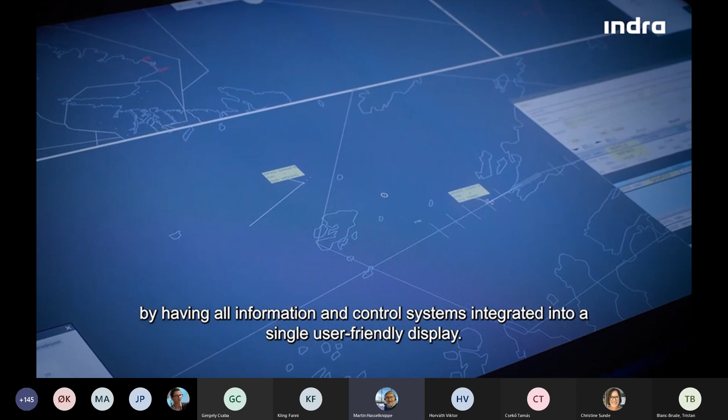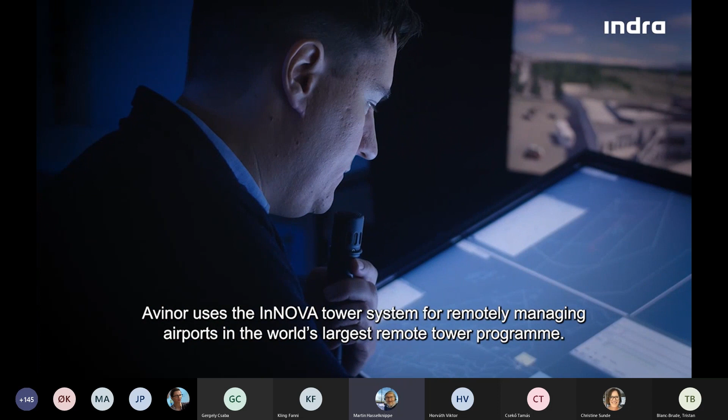We live in a digital era in which we quickly adopt new technologies to make life easier. Yet manual processes and visual observation, looking out the window, are still crucial for air traffic services at most airports. At Indra, we believe in progress. To improve efficiency of service, the InNOVA Tower system allows air traffic service officers to manage several airports from a remote location. Situational awareness is ensured by having all information and control systems integrated into a single user-friendly display. As part of an EU-funded SESAR project, Indra and Norwegian air navigation service provider Avinor have collaborated on research to further improve cost and operational efficiency. Avinor uses the InNOVA Tower system for remotely managing airports in the world's largest remote tower program. Together, we have successfully validated dynamic remote towers, allowing flexible allocation of airports between different working positions. In 2019, we validated that one air traffic controller can manage up to 3 airports from a single integrated working position. Now we've taken it one step further. We allow controllers to move control of airports to different working positions. If something happens so you need to focus on a single airport, you can transfer the other airports to your colleague. This brings a new level of teamwork and operational flexibility to air traffic management. During this validation, we have simulated the operation of 3 airports from one single working position, but we have also introduced aircraft emergencies and bad weather conditions, and we have also focused on the transfer of airports from one working position to another, and included in that the supervisor role in the control room. The experience is that it's good to integrate all the functions into one single working position and to have all the functions that are needed for the controller. That also helps us in organizing the service provision in the future. Like many other countries, Norway has a lot of smaller regional airports. They're operated by 2 to 3 controllers each. If we can do that in a remote tower center, where one operator can operate 3 airports, 3 operators can operate 9 airports, we can get a more flexible service, cheaper service, and not to forget that the work satisfaction per controller will actually increase massively. The future is here. Embrace the progress.

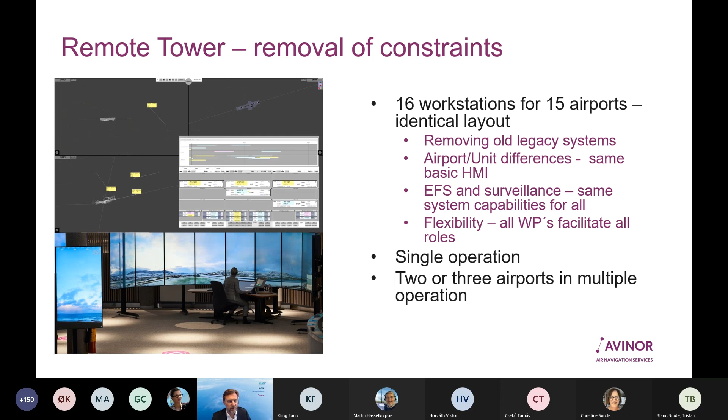And with that, we will be achieving cost benefits. To do so, we need to have multiple aerodrome endorsements for each individual working in that center. That we have started already, although multi-mode is still a bit ahead of us. We start with the multi-aerodrome endorsements because that will also give us more flexibility in single mode.

With the operators having more than one endorsement, we can train, we can plan, we are more robust when it comes to single operation. And there could also be times a day where we could do what we call sequential mode, where one operator could still operate 2 airports, but then only one at a time. But of course, multiple aerodrome endorsements is the key enabler for multiple mode.

To do so, we will have one unit training plan and as few local differences as possible. That's part of the remote program, to now make those tower operations as equal as possible. So the same tools, same basic HMI for all aerodromes, and common unit operational procedures as far as possible. Of course, there will always be local adaptations when needed, but if not needed, we will do it the same.

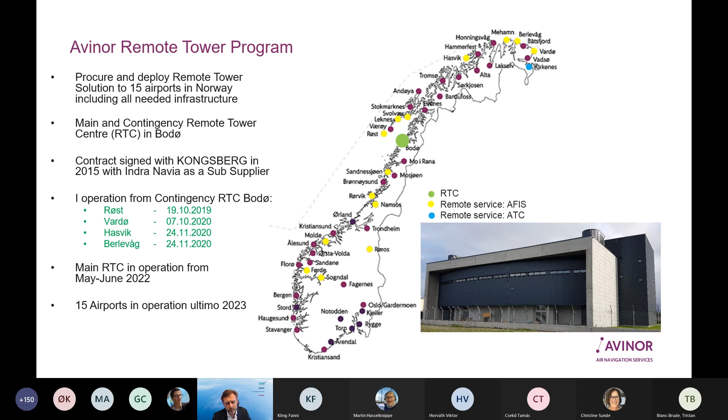The main center, as you saw, is now built. We have set up all RTMs to handle up to the 15 airports. This center is now in the final stage of testing. We have conducted both the FAT and the SAT on the software. We have done the passive shadow mode, and we are now doing the last week of stability tests on the software. So all in all, this center is now ready to be put into operation, and we'll do so early in May.

Starting off in single mode, the position in front here, where people are now just sitting with laptops, will be the operational supervisor position. When we go into multi-mode, we will build up the supervisor position, and the supervisor will have line of sight to each and every RTM and operator within this building. So what we're doing in the SESAR validation now will be the next move in this center, where we upgrade it, so to speak, to go into multi-operations.

A few more pictures from the center. We really believe this center will be a really good place to work. We are able to bring a lot of people to work together here, hopefully with good discussions among the workers, and we will be able to build much more flexibility and robustness into the operation in this center than what we have today in the individual towers.

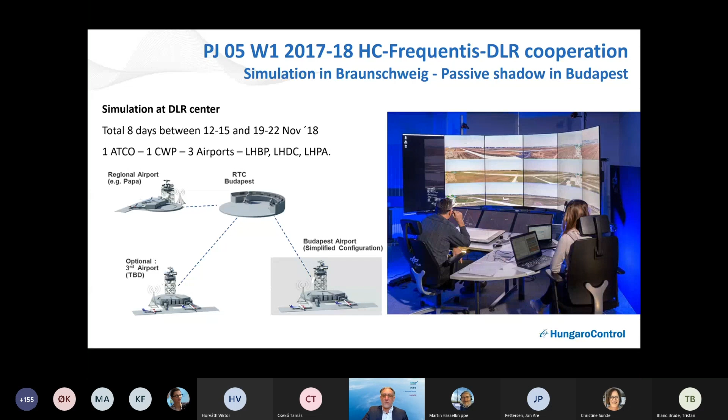So therefore we went on with this project, and we made a passive shadow validation at Budapest after installing the camera systems for all the 3 airports, passively monitoring the traffic, not controlling, but monitoring from the centralized controller working position.

The lessons learned, the usability, situational awareness, and the procedures. We got a better understanding and better knowledge of how these kinds of operations with the multi-remote can increase situational awareness, what conditions are needed for the controllers to handle the traffic safely, and what requirements apply not only to the technical system itself, but to the procedural and the training side for the human staff to provide the service without any issues and increasing the safety.

So last year we went on with this project in cooperation with Indra, and last November we had a simulation in Asker at Indra's headquarters. We provided the solution 35 with multiple remote tower planning using the planning tool provided by Indra, and we had quite a lot of lessons learned during these simulations. The results will be introduced later by my colleague Ms.

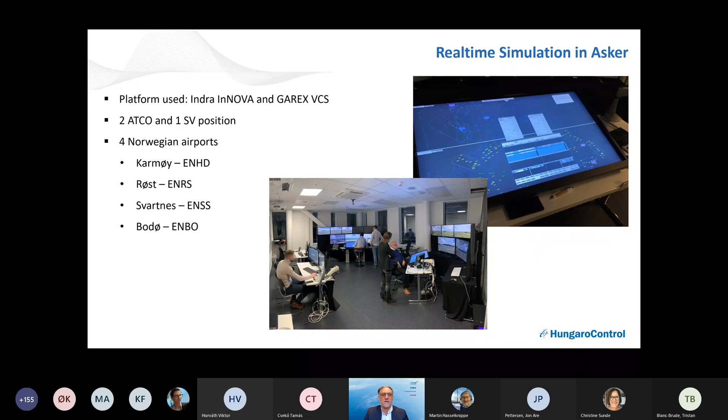So in a nutshell, that was my presentation, and the results you will get later on from my colleagues. So thank you very much for your attention.

Thank you very much, Csaba. Very interesting to hear. We will now move on to the next part, talking about automatic speech recognition. It will be presented by Georgi Balog and Viktor Horváth. But before they start, we'll show you a short introduction video to this topic, which is a new topic to us and to many, automatic speech recognition in ATC environments. So then I'll switch over to the video again.

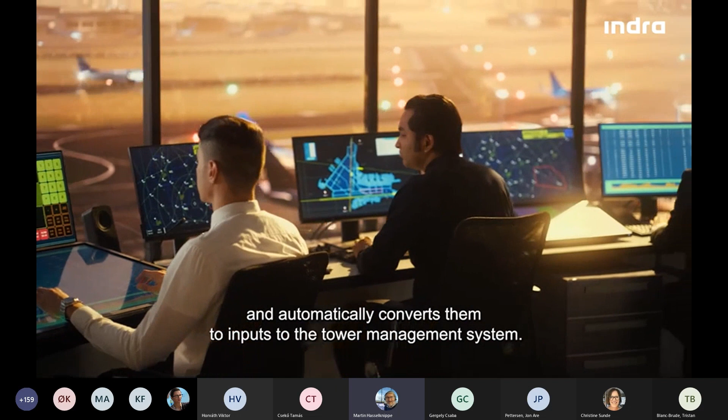Hi Siri, text Mum, I'm on my way. Virtual assistants can make life easier by managing everyday tasks based on voice commands. In air traffic control, voice commands are essential for ensuring flight safety. But unlike the virtual assistants on smartphones, the voice commands need to be manually registered into the tower system. That may be about to change. Indra is working with HungaroControl in an exploratory project funded by EU's SESAR joint undertaking to develop automatic speech recognition aimed at air traffic control. The goal is to reduce the workload of the air traffic controller. The system recognises verbal instructions related to a specific flight and automatically converts them to inputs to the tower management system. This eliminates the need to manually enter the instructions in the system.

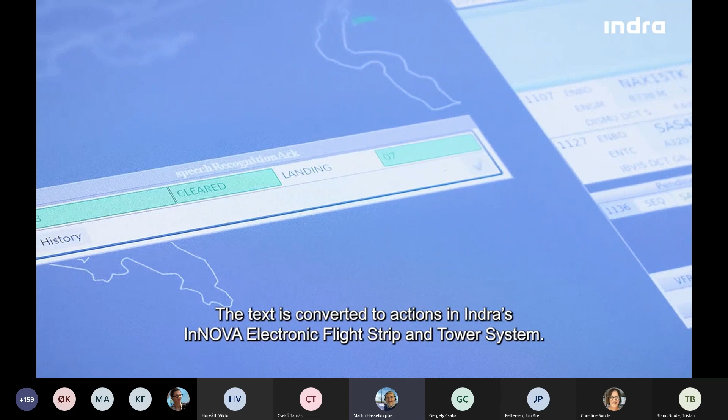The principle is simple. The air traffic controller gives a pilot a command through Indra's Garex voice communication system. A module developed by Hungaro Control interprets the spoken words and converts them into call signs and commands in text form. The text is converted to actions in Indra's Innova electronic flight strip and tower system. Scandinavian 4558, lineup runway 07. Lineup runway 07, Scandinavian 4558. Automatic speech recognition saves time for the controller by reducing manual registration of commands. The controller can focus on more essential tasks, improving flight safety and operational efficiency. North Shuttle 15 Tango Kilo, runway 07, clear for takeoff, wind calm. Clear for takeoff, 07, North Shuttle 15 Tango Kilo. The future of air traffic control is digital. Embrace the progress.

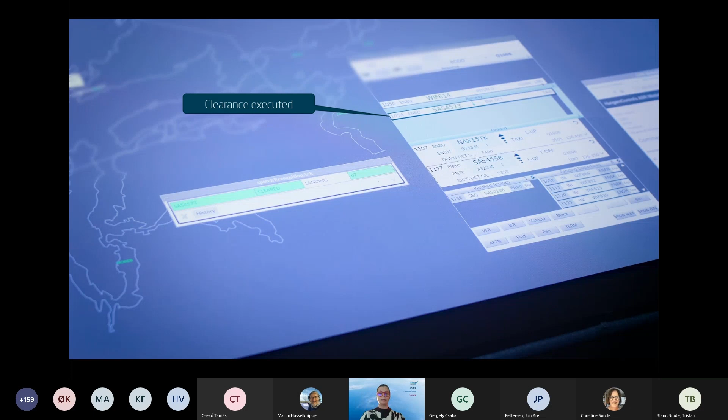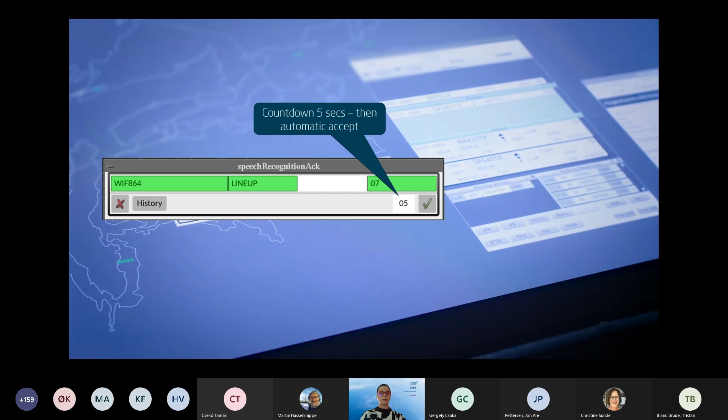Let's have a closer look at the ASR recognition window. This is how it looks, containing some information. As you saw earlier, the recognized call sign, the recognized clearance, the parameter which belongs to the recognized clearance. In this case, the 07 is the runway direction, but it also has some other information. For example, a timer, which counts down for 5 seconds before the clearance is automatically accepted. This is a configuration parameter, so it can be set to any other value.

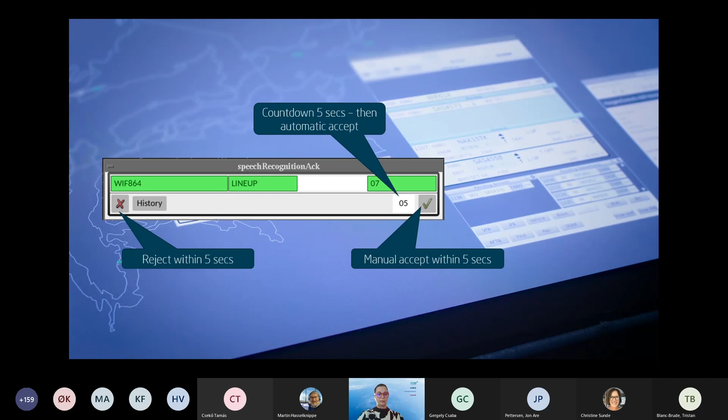If the controller is not happy with the recognized clearance, then they can reject it within these 5 seconds. And also, it's possible to accept the clearance within these 5 seconds. So in the next minute, I will show you a short video.

Scandinavian 4573, runway 07, clear to land, wind calm. Clear to land, runway 07, Scandinavian 4573.

You see the call sign highlights.

Scandinavian 4558, taxi to holding point Alpha, runway 07. Taxi to holding point Alpha for 07, Scandinavian 4558. Widerøe 864, startup and pushback approved, QNH 1006. Startup and pushback approved 1006, Widerøe 864. Scandinavian 4573, runway 07, clear to land, wind calm. Clear to land, runway 07, Scandinavian 4573. Scandinavian 4558, taxi to holding point Alpha, runway 07. Taxi to holding point Alpha for 07, Scandinavian 4558.

Scandinavian 4106, runway 07, clear to land.

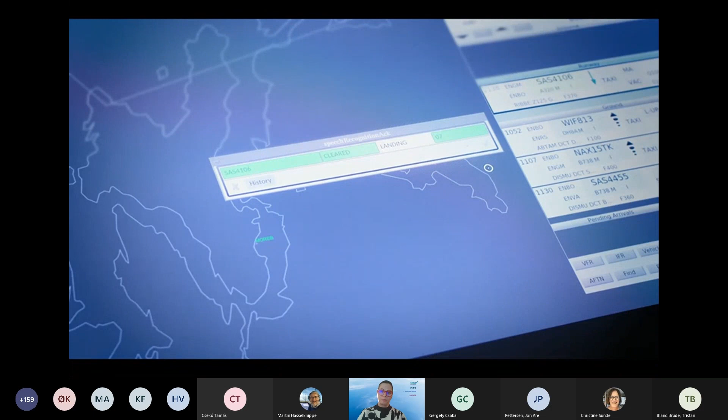North Shuttle 15 Tango Kilo, taxi to holding point Alpha, runway 07.

This is a wrong recognition, so the controller rejected it.

North Shuttle 15 Tango Kilo, taxi to holding point Alpha, runway 07.

Scandinavian 4106, go around. I say again, go around.

And this clearance is also rejected because the aircraft already received the landing clearance, so it was just like a

Scandinavian 4455, startup approved.

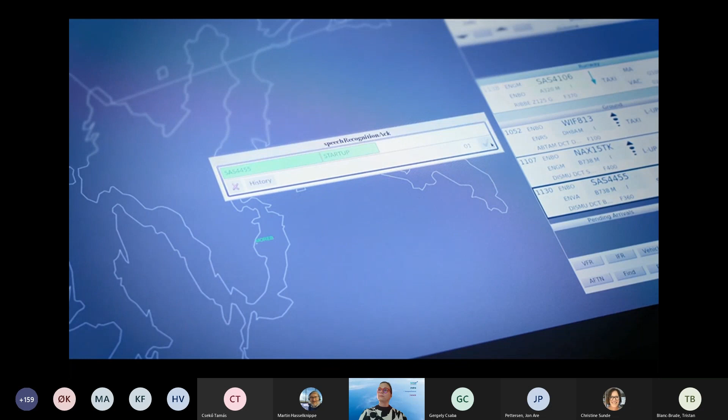It was a very short introduction of the ASR, so thank you very much for your attention. And I will give the word now to Viktor Horváth, who will give you more details about the ASR module, how it works.

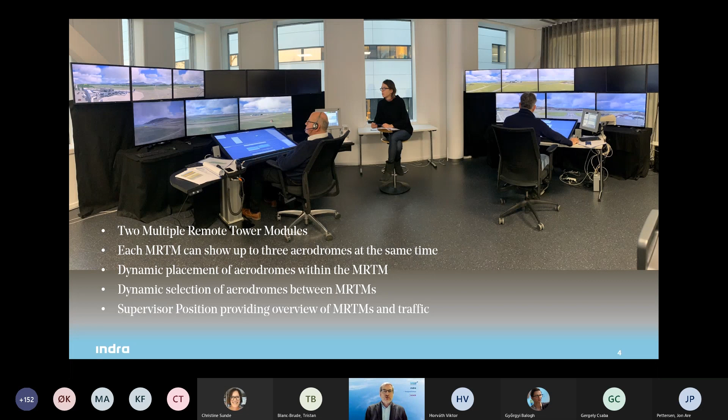So that's the new thing in this validation, the dynamic allocation, both by the controller, also between the controllers. Normally the controllers themselves select which aerodrome to have, but there's also an ability for the supervisor to do that work. So we have the supervisor position. You don't see it in this picture, but we have the supervisor position with some tools to assist the controllers in the remote tower center.

So we had 2 of those MRTMs and then 1 supervisor with a dual screen and a voice switch on the side. Connected were also 4 pseudo-pilots in another room. They were controlling the aircraft and controlling vehicles and responding as remote destinations, approach or fire service or military or the airport authority in the validations. So that was a part of the simulator to be able to control all this.

This picture shows more of an overview of the MRTM. You see the 3 different aerodrome display slots out of the tower views, and then the 43-inch touchscreen in front of the controller on the desk, and the voice switch screen on the side. The heads down screen is a touch screen, but the controller could select whether they wanted to use touch or the mouse on the side there. The voice switch screen is a touch screen.

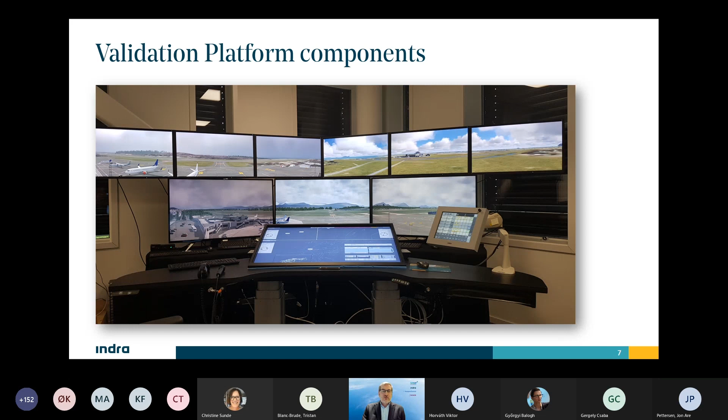So the out of the window view, the heads up, is provided by the Micronav BEST simulator. So that provided a tower view for all the 3 airports you can see at the same time. The heads down screen is part of the Indra InNOVA ATM system, and this is an ATM system that we provide for operational use, both for small towers and large complex towers around the world.

Also, the supervisor tools are a part of that Indra InNOVA tower ATM system. The voice communication system used is the Indra Garex voice switch. And then, as we just heard about from Viktor and Gyöngyi, the automatic speech recognition engine from HungaroControl connected to this. So we've done further prototyping on all these elements to adapt to the multiple environment and dynamic allocation.

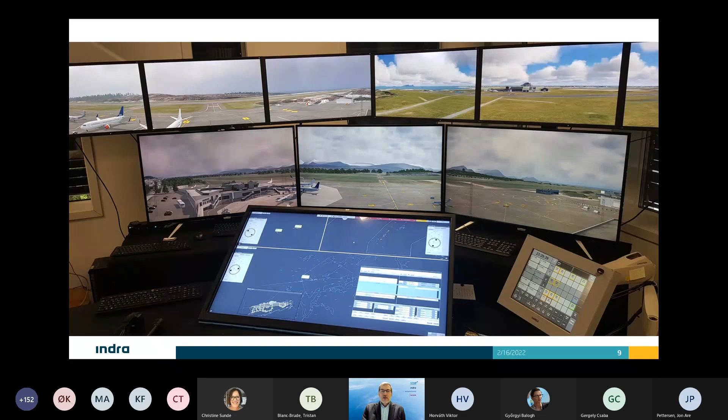So when looking at heads up, we have these 3 display slots for the 3 different airports, A, B, and C. And you see that the screens for the A display slot are a bit larger. This is to resemble the implementation Avinor has in Bodø. You saw on the slides and the pictures that were shown by Jon Are Pettersen earlier that they had larger screens. And in the multi-setup there, the A slot will have a 360-degree view, while the B and C slots will have a 180-degree view. In this validation for the simulator, we had a 180-degree view on all the 3 slots.

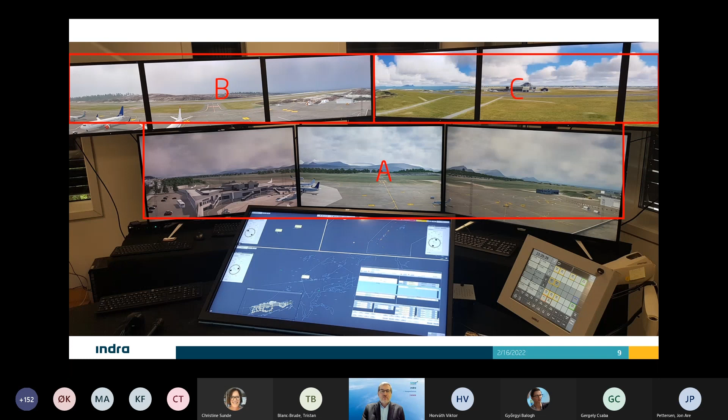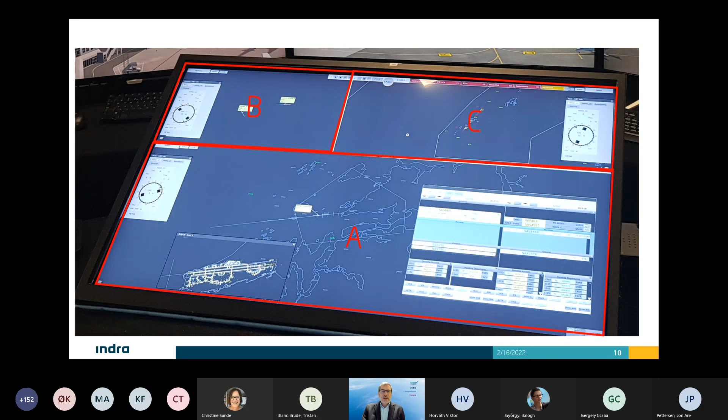The A, B, C setup is the same on the heads down. So aerodrome A is on the lower, both on the heads up and heads down, the same with the upper left and upper right. The heads down, as I said, has support for up to 3 aerodromes. You see the background is a surveillance picture. These aerodromes that we simulate in the validation don't have any ground surveillance in real life, so we didn't provide any ground surveillance in the validation.

Most of these smaller airports don't have that, so we only have air surveillance, and we had limited the air surveillance to above 300 feet. But we have the surveillance picture, so all airports had surveillance in the air. We had approach tools for the airport; one airport that we tested combined tower and approach. We have the electronic flight strips on the lower right side of the screen there. We had MET information coming from the simulator.

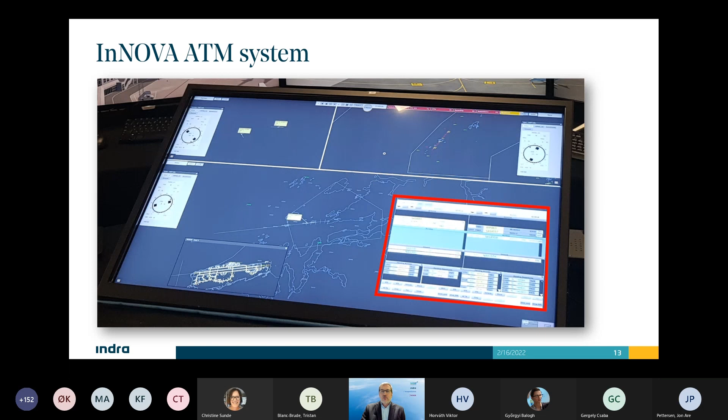We had the aerodrome selection panel where the controller could select which aerodromes to have on his screen. It could be selected in view mode or in a full operational mode. And then a planning tool, which is new in this multi-setting, a timeline for the controller to look at how the traffic develops over time. So if we look closer at this part in the lower right side, which we call the dashboard, the upper part is the timeline, which is the ATCO planning tool.

And the planning tool shows all the flights that are present and in the future as a line in the timeline. So you can see at what times you will have multiple simultaneous flights, and by that get an assessment of the workload you can expect in the future. You have color coding, the same color coding as you do in the flight strips, to see what's IFR, VFR, arrivals, departures, etc., and get some more information. And the controller can select what time span he wants to look at, whether it's only the next 20 minutes or the next 4 hours.

The lower part is the electronic flight strip system, and it's divided into 3 here, where you see the 3 airports separately. So we have a separate EFS for each of the 3 airports. And because these are simple airports, we have a limited number of flight strip bays. We have an airborne bay, a runway bay, and a ground bay, in addition to 2 pending bays, pending arrivals and pending departures. So you see the same color coding being used here, and also for vehicles.

And you can also expand these flight strips to get more information on the flights. And the EFS is used to log the clearances given, lineup clearance, clear for takeoff, clear to land, etc. And that will move the strips between the bays. And that was done automatically with the speech recognition, as we saw earlier. So this is the dashboard part of it.

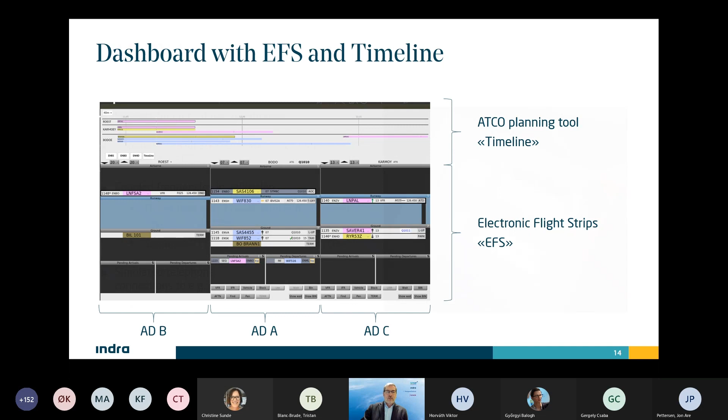The voice switch also supports communication with up to 3 aerodromes, and voice communication is an important part of this validation, both to see how the communication with aircraft and vehicles is, but also between the airports and use of aerodrome call names in the call signs or in the clearances.

The voice switch is also connected to the InNOVA system, so when the controller selects a new airport into his working position, the voice switch will also be automatically reconfigured, and frequencies and direct access telephone keys will be added for that airport. So it's consistent. All the parts, the heads up, heads down, and the voice switch are configured automatically.

In the tower, we separated between tower frequencies to talk to aircraft and vehicle frequencies to talk to vehicles. They were separate, and they were also separately coupled in this validation. So we had one coupling group for all the tower frequencies between the 3 airports and another coupling group between the vehicle frequencies.

And for the controller, we provided a microphone with 2 buttons. With the upper microphone button, the orange one, you transmitted on the tower frequencies to the aircraft, and using the black lower button, you transmitted to the vehicles. So we wanted to avoid too much pressing and reconfiguring on the touchscreen itself. The controller could press either of those 2 buttons to transmit to either aircraft or to vehicles, which worked very well. And also, of course, the voice switch provided the simulated telephone connections to approach, fire services, airport authorities, military, etc.

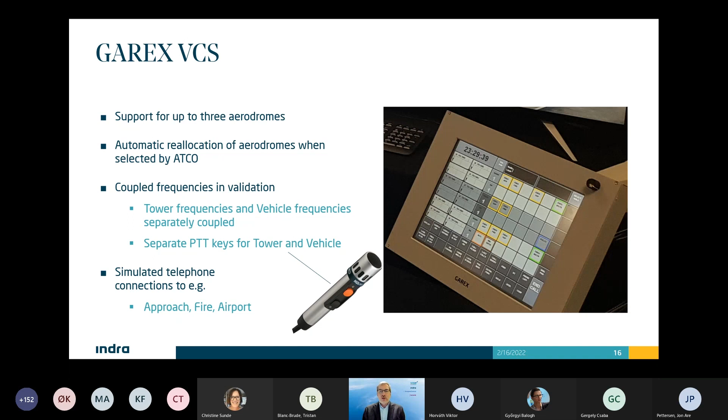Then on to the operational supervisor working position. As I said, this is an important part of the validation, a separate objective, as the supervisor role in a multi or in a remote tower setting at all is new. So we wanted to see how that worked and how we could support the controllers in that aspect, but also give the supervisor a way to plan the allocation of the remote tower center. He has to plan which airports to combine to a controller, when to split them, etc. And then he needs some tools. So we have developed through this project some tools to test out in the validations.

One is an overview tool, where the supervisor has an overview of all the airports connected to the center, all the RTMs in the center, and how each RTM is now using the airports. So which airport is now being used in which position, and also by which operator. And you can get some information about the runway in use, the meteorological conditions on the different airports, etc. The supervisor also has the ability to see a surveillance picture, and they can zoom in to any airport to see the traffic around that airport.

They can have an alarm list for the center and airports, and also a planning function for the supervisor, which is an extended version of the one we had for the ATCO. So the supervisor is able to see the traffic for all the airports in the center, and can also combine logically different airports to see how that works in the future. So that's a what-if function for the supervisor to see what if I combine these 2 airports or these 3, how will that work out in the future? And then they can plan how to merge or split aerodromes on the RTMs.

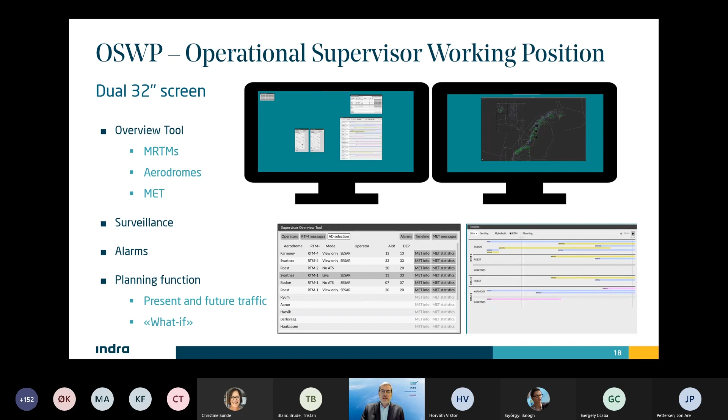To provide the out of the window view and also the stimulation to the system, a very important part is the simulator. And we have a good cooperation with Micronav that provide the BEST simulator for this. They have 2 versions of this, BEST Tower and BEST Radar. And in this simulation, we use BEST Tower, but also the airspace from the radar to be able to simulate the approach functions. So Micronav has provided the simulators for many years and is based in the UK, providing this for ATM training and validation purposes.

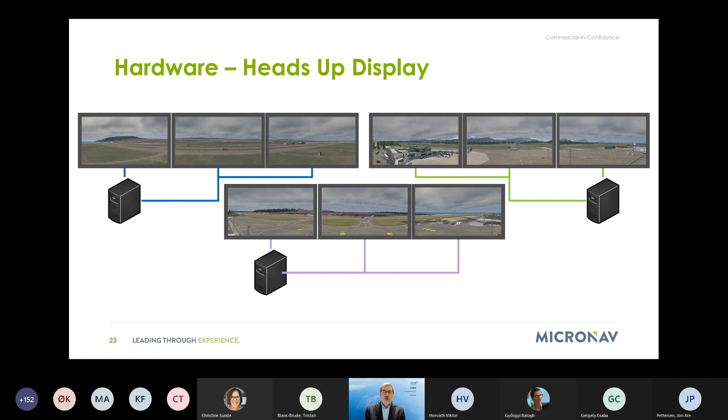Micronav has also developed and further enhanced the product to be able to support this multi-concept. So the single simulator was able to provide simulation data for 4 airports at the same time. And as you see, we had 3 physical screens showing each airport, and we had 1 computer feeding those 3 screens. And this was with a full 4K UHD resolution at a full 30 frames per second update rate. So it demanded quite a heavy graphics card to be able to provide this level of detail, but it was very helpful.

Micronav made models of all these 4 airports, both the ground space, airspace, but also the 3D view of that airport, to be able to provide as much realism as possible. In these operational validations, we put the controller in front of the system, and to have the out of the window view with as much level of detail as possible is very important. That gives a more realistic impression. And especially with these smaller airports where we don't have ground surveillance, the visual part of it becomes even more important to be able to visually see where aircraft or vehicles are.

And we also put into the exercises situations where vehicles maybe didn't follow an instruction or an aircraft didn't quite respond as expected, to see how that worked in a multiple setting when you have to divide your attention between multiple airports. So the fidelity of the out of the window view is quite important. And it simulated very well the behavior of aircraft, the vehicles, other ground features, but also the weather situation and light conditions. In one of the exercises with HungaroControl, we also simulated low visibility procedure settings with a lot of fog and difficult visibility conditions.

The interfaces between the simulator and the Innova were multiple. We had an ASTERIX feed to provide the surveillance for all the airports. We had an AFDM feed that provided the flight plans for all the airports and all the flights in the airports, and individual feeds that provided MET information. So we also had changing MET, QNH changes, wind condition changes, etc. during the exercises. We also had a scripting interface going the other way so that the Innova system could give commands to the simulator. And that was especially useful when selecting a new airport into the user position, so that the simulator could then change the out of the tower view and adapt to the correct view.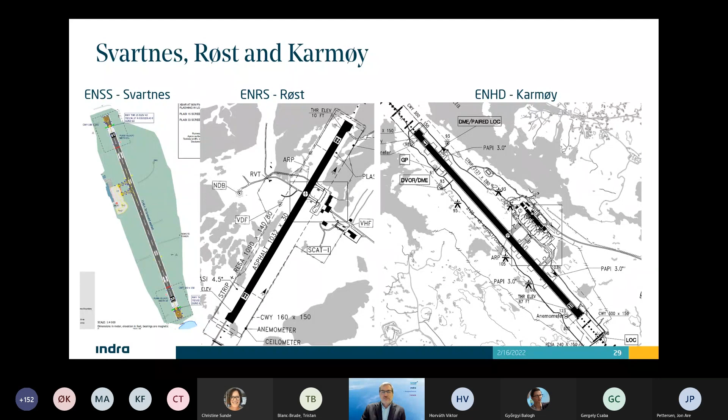I'll show you a short video demonstration of the platform and how it was used. And then I'll stop this and I'll turn over to a video.

At first in the video, you see a single operation. So we have one airport, which is Bodø, up and running. And you see in the background the aircraft taxiing. And on the heads down display, we have the single airspace. And you can also zoom into an inset window for details. But again, we didn't have surveillance on the ground in the validation. You see MET information on the floating window to the left. And you see the dashboard with the different flight strips.

Then we add a second airport, select from the menu, press OK, and then you see the screen splits. A new airport is added on the heads up, and now we have a two airport situation, one at the top and one on the lower.

So those are independent. You can zoom in and pan as you like and see the traffic on those two airports. Also individual MET windows where you can open and close. Then we'll add the third one. You see the list here. You can just select it and confirm it.

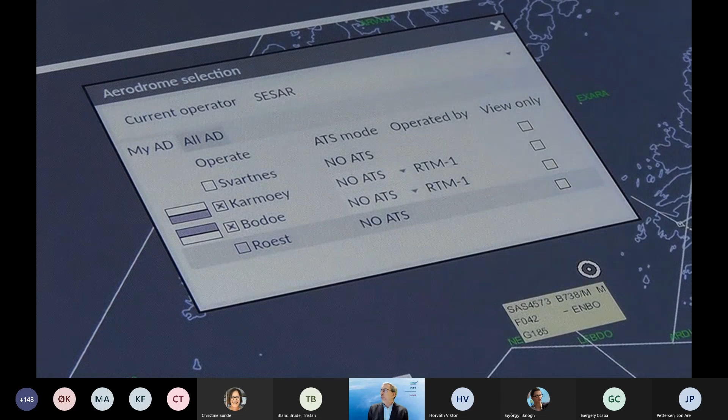And you see also that you can select whether you want to operate or view only to the right in the picture. In this example, we have taken it right into operate, but in the validation handover, you first take it into view mode, and then you get acquainted, and then you do a handover to operate the airport. So now you see that the third airport is being displayed on the heads up and also on the heads down on the upper right side.

So now you're operating on 3 aerodromes on this MRTM. And you also have 3 aerodromes in the dashboard to the right with the EFS, etc. And you can also see the traffic on the 3 different aerodromes. So now the controller has to divide attention between the 3. You can have taxiing aircraft, you can have aircraft taking off and landing at the same time on the 3 different ones. So the human factors aspects come strongly into mind here.

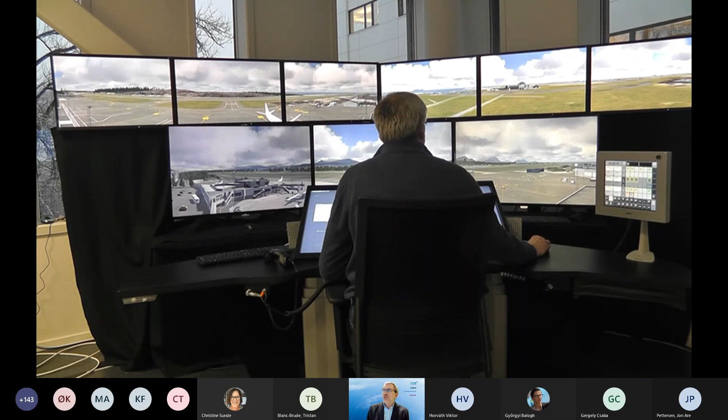When the traffic increases, and hopefully the supervisors detect that before the traffic becomes too much, then you can split one airport and send it over to another position. And as I said, normally you take it up to view mode on the new controller. The new controller can then look at the traffic, see the traffic on the heads down. And when the 2 controllers agree, they do a handover and the new controller will take the airport into operations mode. And then it still stays in view mode on the old controller's position.

Now we'll show an example of when you swap position of 2 airports. We're going to swap the upper right position, the Røst airport, to the lower screens, so that Bodø goes to the upper right again. That's also done. There you saw. Now Bodø is on the upper right screens and Røst on the lower screens. So that could be if you want to use the larger screens for an airport with more traffic, for instance, or more complex operations at that point. So this is totally dynamic.

Now we'll swap it back. We'll see that in a second. It swaps back to the previous setup. There you are.

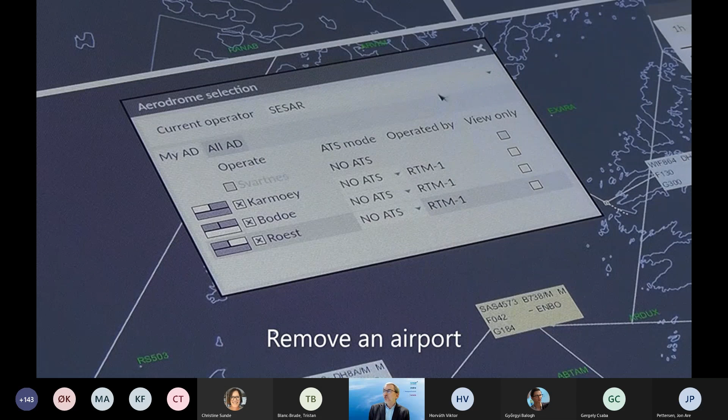The next example is that after you've handed off an airport to your fellow colleague, then you can close the airport or remove it from your screen. And that is simply done by clicking it out and confirming that you want to stop operating it on your screen. And then this RTM goes back to a 2 aerodrome operations mode, again with the 2 on upper and lower on the side here, and the same on the heads up.

So this is totally flexible for the controller, and they can also move the division lines on the heads down between the airports if you need more space on the heads down. Of course, with using a single screen, the space on the heads down screen is important to manage well. That's why we have a very flexible setup on that part. So that shows the platform. Then we'll move over to the validation execution.

And give me a second, I'll give the word to Tristan, and you can start showing how that was done in Avinor. Tristan. Thank you very much, Martin. Hi, everybody. Just going to load the presentation. Should come now.

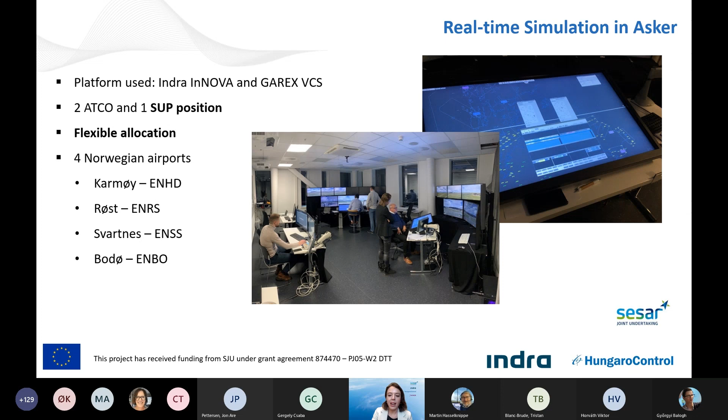Csaba already mentioned this slide, that we had a real-time simulation last November and December. It took 2 weeks and we had 6 Hungarian ATCOs in total, in 2 groups, so 3 and 3 respectively. And we had 4 Norwegian airports spread across the 2 MRTMs and also 1 supervisor position. I was wondering whether I could also show you some of the results, because the analysis has been done. So let's take a look at the higher level results in terms of workload.

This is the Bedford workload scale that shows you the workload averages. As you can see, we had 4 different scenarios. The first one was a normal scenario. We also had an LVP and 2 non-nominal scenarios, the monitor failure and the emergency. As you can see from the figure on the left-hand side, there are no significant differences between the workload averages, and in every case the workload levels are within acceptable levels.

And on the right-hand side, you can see that I've broken down the results into MRTMs as well, because the experimental manipulations actually happened in MRTM1. So for instance, you can see that for scenario 3, MRTM1 had a significantly higher workload because this is where the monitor failure happened.

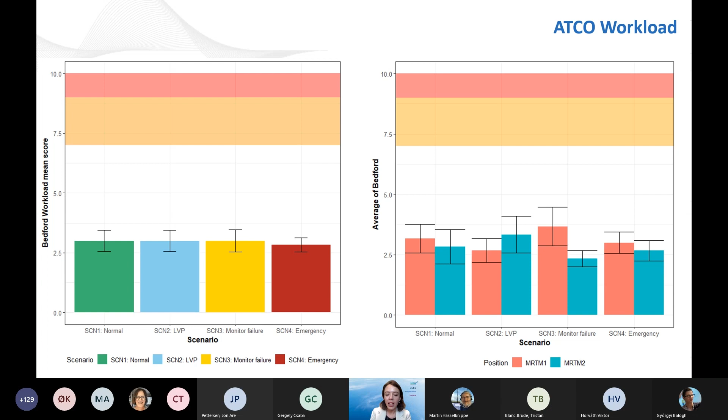But if we take a closer look, we also asked the ATCOs, if their workload was high, what were the contributing factors? And almost unanimously, they said that when they received a new aerodrome, the workload increased just for a few minutes because it took time to build up situational awareness.

And not just in terms of the traffic situation and because they had to coordinate with each other, but also because of the system and the system behavior. Because the thing is that the way the system behaved did not really fit their mental model.

And this brings us to the second point, that whenever there was an aerodrome switch, between the MRTMs or even just within the MRTM, so if the ATCO wanted to swap the positions of the aerodromes, the radar map shifted to a particularly odd position. So sometimes the EFS covered the new position of the radar map. And interestingly, the MET window remained on the same spot. So this led to confusion and also a temporary loss of situational awareness.

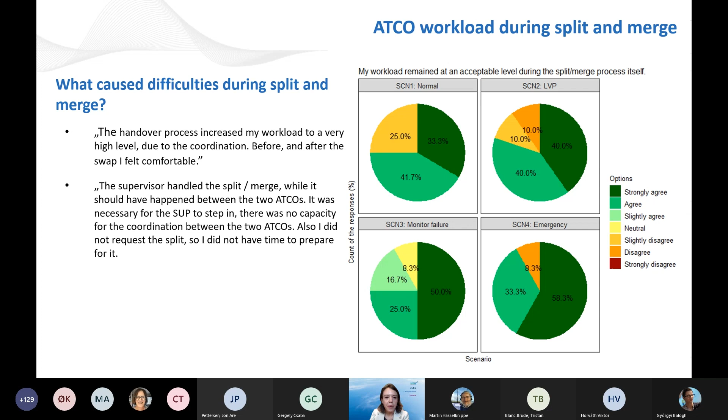Okay, so I was thinking that maybe I will not talk too much about the ATCO HMI because of the time limitation, and we'll just jump right to the supervisor system, given that the supervisor system is really a focus in this solution. So you can see on the pie charts that the feedback was really positive. In fact, the supervisor system was highly praised. So I brought you also an extract from the feedback where they claim that the planning tool in the supervisor timeline is the best tool for a supervisor in an environment like this. It is really useful, although it could be a little more accurate.

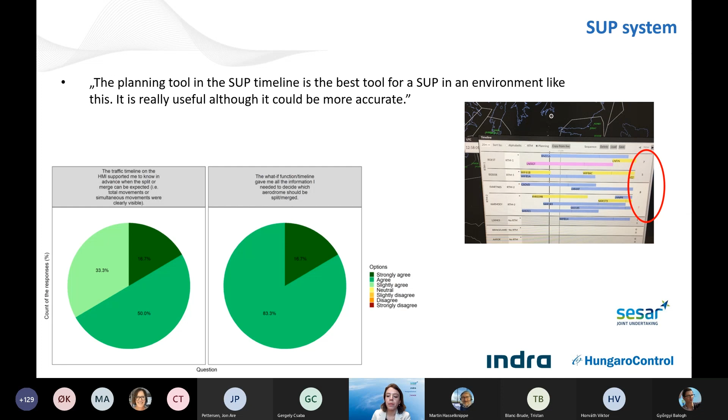There were some issues with the accuracy, but ATCOs went to the MRTM and double-checked the traffic and made their decisions based on all the information that they could gather. And it was really nice that the supervisor system actually showed this simultaneous movement, and whenever it was above the threshold, which was more than 6 simultaneous movements within the MRTM, then it turned red, so it was quite visible that there will be some overload. In fact, you can see here in this next slide that there is this yellow bar, which indicated the overload periods within the MRTM. So the supervisor's situational awareness was really supported by this system.

I really like this one because some of the ATCOs pointed out that when they controlled the traffic in the MRTM and there was a supervisor decision to split, they felt that it actually hurt their pride because they felt that they could continue the work, they could still provide ATC to the aerodrome, yet the supervisor made this decision. So it was also interesting to hear this from the supervisor point of view.